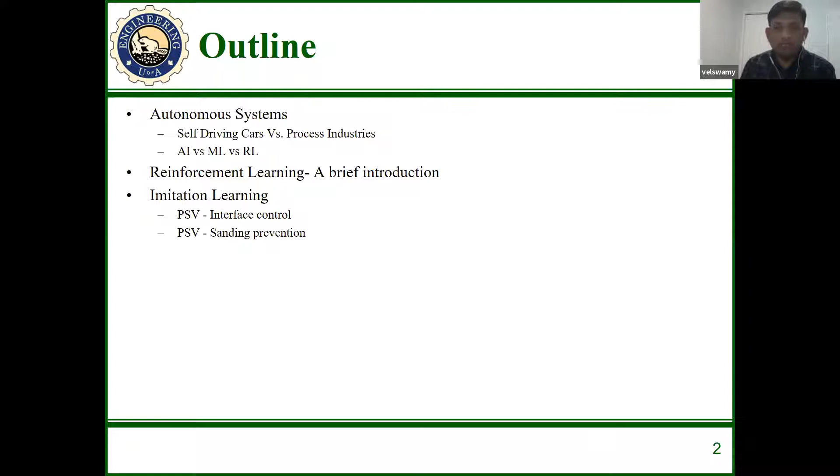So autonomous systems. Decision making is an important part of being a human, and not just mapping between certain inputs that we see and certain decisions that we take based on the inputs. The way we train ourselves, and the way we tackle our situations, all that comes under the purview of autonomous systems. So in eventuality, if there is a certain event that was not anticipated in the past, what would be the actual response that you would get from the agent or the controller that you have trained? That's usually the autonomous part of the decision making.

So there are systems that do exist. If you look at the missile defense systems, which form a blanket over a confined space or maybe the entire country. Given there is a launch of an intercontinental ballistic missile or things of sorts, an autonomous system kicks in, it knows the launch, and then it triggers certain events which make sure that it pinpoints the trajectory of the incoming missile, and it tries to destroy it before it can create havoc in the country. So this is something that does exist.

We've also seen autopilots that are in existence in aeroplanes, at a very high sophisticated level, from a few decades in the past. So this is not something new.

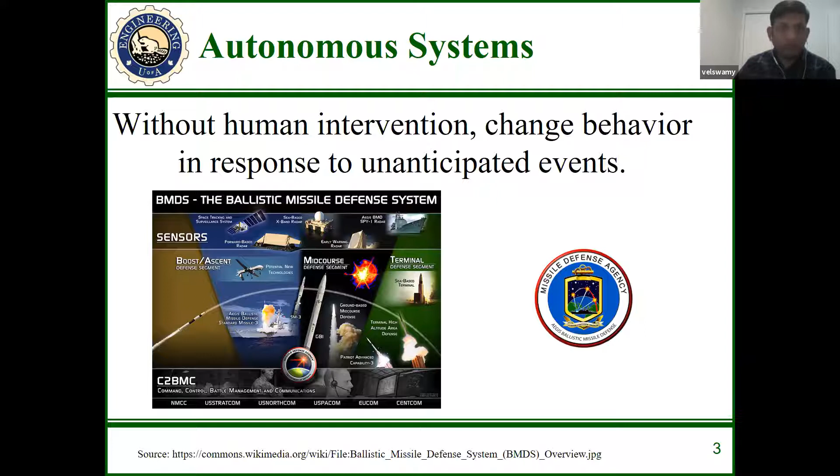When it comes to standardization of different levels of autonomy, there are a multitude of approaches seen in various industries. The one that has come out with a clear demarcation of each level of autonomy is the automotive industry. With the advent of companies like Tesla, which are promoting autonomous driving, this becomes important because the progress of each of those organizations in such technology needs to be graded, and metrics need to indicate what sort of capabilities their vehicles hold.

At the lowest level, we are talking about no autonomy at all. It's a basic vehicle which does not have any electronic control units which talk to each other or log some data which could be processed later. So it's like the ones from the 80s or the 90s.

Then comes the first level of autonomy where you have operational assistance. For instance, you have cruise control where you're on the highway and you just want to take your feet off the gas pedal. So you switch to cruise control at a certain speed, and the vehicle tries to maintain that speed. However, the steering control is still in your hands. And one other scheme is the lane departure alert, where it could alert the driver saying, hey, you're way off your lane, please correct yourself.

The next level is occasional self-driving. You're on a highway and you know that things are all working fine and it's a clear day, so you switch over to occasional self-driving. The vehicle may at some point not need you to steer, but you would still hold your steering wheel because that would probably be necessary.

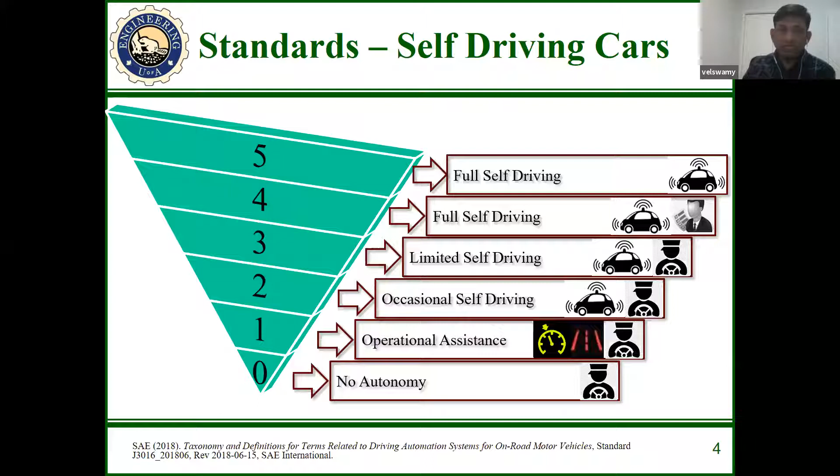Now, is there something of that sort available for industrial plants? Though there's not a fine print on the demarcations and there's no general consensus on how we could look into these sort of standards for an industry, there does exist some amount of discussion that happens in the organizations by their own. Probably at some point they would come together to discuss more about it and standardize it.

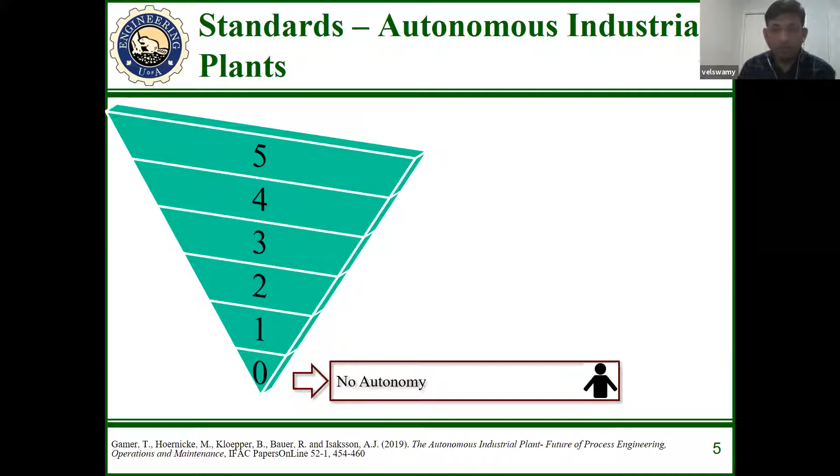At this point, a few publications have become available, and one of them describes autonomy in terms of industry as: no autonomy, where we do not have any sort of autonomous systems. Of course, we have automation, but not autonomy. The next one is operational assistance. This is primarily the digital twin as being discussed in the industry now.

The idea is there is an experienced person, and that experienced person has certain decision-making intuitions, which is probably not something that you can map into a mathematical model because it's more human. So how do you capture the essence of their experience and make sure that in a certain scenario, you give some recommendations where there are certain priorities set to the kind of decisions you can take, based upon the previous experience of that operator?

And this can very well be used in trying to absorb the experience a person has obtained by working in a certain plant and making sure that the transition of that knowledge from that person to someone who is new takes place as smoothly as possible.

Now, occasional control is probably the next level. For instance, if there is a startup or a shutdown, there is a necessity for us to follow a certain sequence, which is pretty mechanical in nature in the sense that the sequences are pretty direct. So you could probably yield control in those situations from a human being to an autonomous system, which can take care. And then comes limited control. Then again, it's a fine grain.

And full control is where you're talking about one supervisor sitting in the control panel or the control room for the entire plant. And all he does is just be there to assess how the system's working, and he does not much.

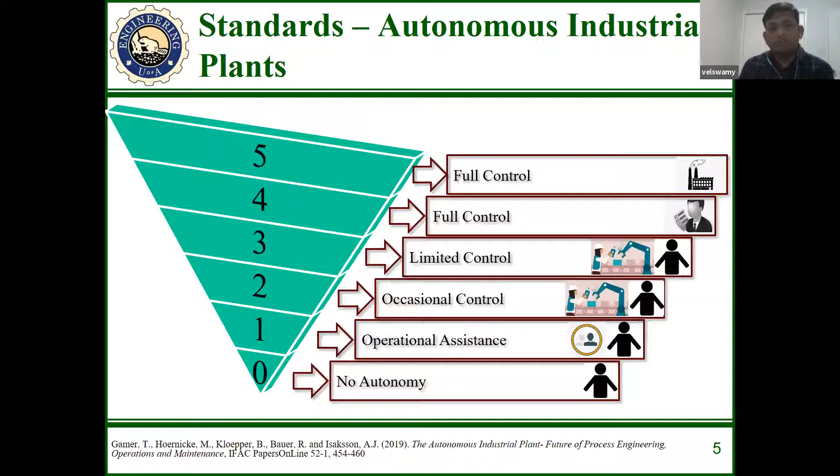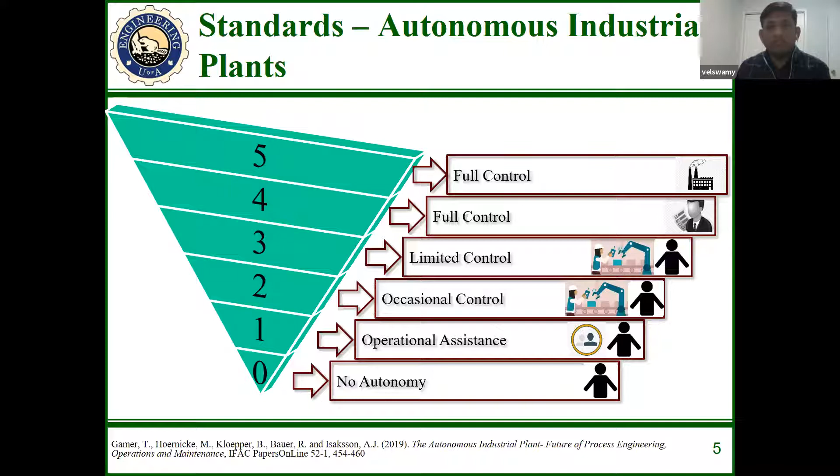And full control is where you have complete autonomy, where there's no single person in the factory, and the entire enterprise solution and the business requirements are trickled down directly to the level of the PID controllers. And therefore, you could probably bring in the financial direction of the company and also environmental compliance and all that, and trickle it down to level 0, where there is a meaningful transition of information from one level to the other.

Again, the difference between autonomy and automation. So what we do in automation is we sense. Of course, there are a bunch of sensors. We might also replace them with a data analytics or a first principles or some sort of a linear regression based soft sensor, and we analyze. Analysis is usually predetermined. So you have a bunch of rules, for instance, if-elses, or it's an explicit sort of a scheme where we have a PID controller.

So you're sensing something and you know that it has to be reaching a certain set point. So the deviation is used, and proportionately a certain amount of action is taken. So all these are predestined. If not specially designed, they are not capable of handling adverse situations.

Whereas autonomy, on the other hand, does not sense but perceive. For instance, it can be an image. For instance, you are walking out in the park on a bright day, and you get to see a particular frame, maybe through a camera, and a bird in that frame would be a feature. So how do you know that there is a bird in the frame? So that is perception. So there is a necessity for us to extract a feature or many features out of that particular frame and make sense out of it.

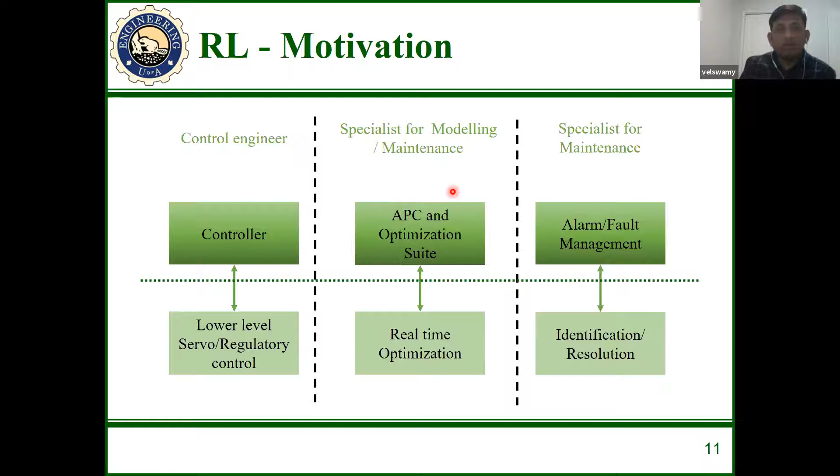From an industrial control hierarchy, there are a few places where we can employ reinforcement learning with respect to trying to learn what a person has gained as an experience. So these are such situations. When we are trying to explore reinforcement learning, one thing that comes into the picture is how do we make sure that it is generalized to take care of every other situation.

For instance, you've been using the transit or the buses which ply locally in, say, Trichy, and now you are asked to do the same in Chennai. There is a multitude of information that is necessary for you to ramp up on your usage of the transit in Chennai, whereas you had enough knowledge to use it in Trichy.

So this is because of the new sort of experience that the agent is being put through. In a similar sense, when you operate your plant at a certain operating region, and that's where you have all the data, and that's where you have trained your reinforcement learning agent, all of a sudden your plant moves from one region to the other. How does your RL agent understand the new region of operation, and how does it do things to make sure that the plant still runs in an optimal fashion, at the same time ensuring stability?

So the stability of the process during the learning scenario for the RL agent is a pretty important bottleneck to deal with. When you're talking about neural networks to represent the reinforcement learning agent, the neural network in itself has its parameters that you need to tune. Like in a PID controller, you have KP, KI, and KD. In terms of neural networks, it just explodes. You're talking about a few thousands of parameters that need to be tuned.

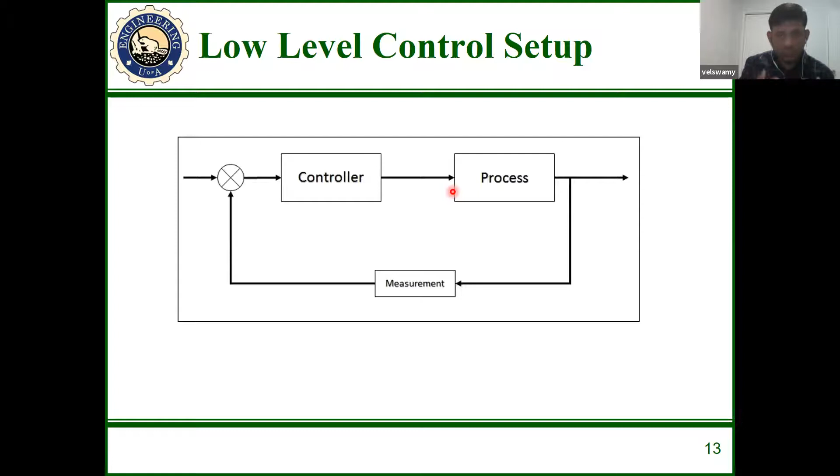So all that is something that's aided, but the kind of space you'll deal with in that level is much smaller compared to the kind of space here, meaning when you look at a measurement, for instance pressure, it's going to be continuous. It's not going to be discrete. So you're looking at a huge amount of data that you will need to really train your network. So if it works here, it's going to work at higher levels. So the way we see it is the controller is actually the agent.

And we use a scheme called actor-critic, where the actor is the neural network which maps your measurements to your manipulations. For instance, it measures the pressure, and then it controls some sort of a flow rate. And the critic is what tries to understand the action in a longer-term sense. So what is the long-term impact of a certain action? That's what the critic looks into. So the critic is measuring the longer-term returns.

So the return is, for instance, if you take one sample time, you're going to have a measurement and a set point. So that deviation becomes a reward. And if you look at the reward for a certain number of steps into the future and you combine them together, then you get the returns. So this is the reward that you have obtained for taking a certain action for a given measurement. So this would allow us to optimally take decisions, which is something similar to an MPC, but in an MPC you would use a model. Here you don't need a model.

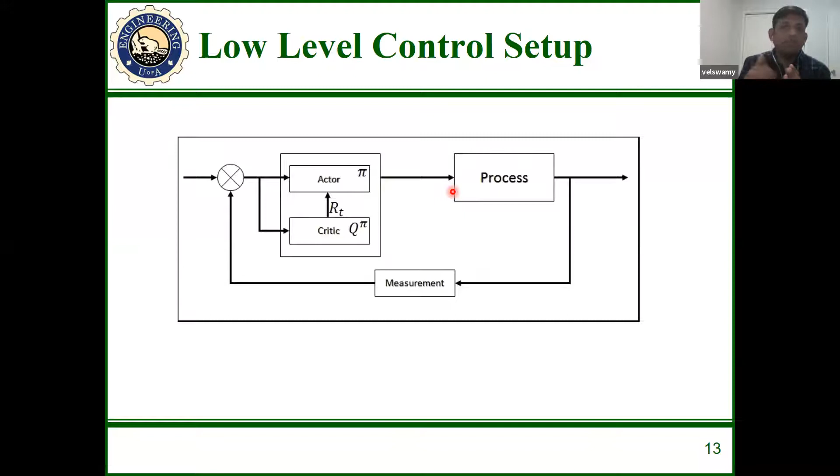Now, all we're doing is the neural network tries to see, if you have a certain point in that space in the input, what's the best point in the output space which can optimize some objective. That objective can be economic, performance oriented, or it can be compliance oriented. And it goes on to learn the best possible mapping at any given instance. And this is exactly what we are trying to do with the neural network using reinforcement learning.

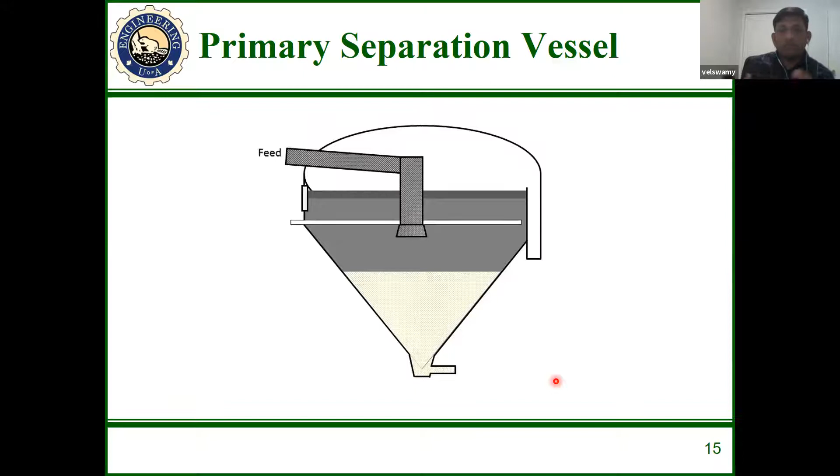A primary separation vessel as such takes open pit mined tar sands that are brought in, crushed, mixed with hot water and some chemicals, and fed into a PSV, which consists of 3 different layers. So you have the middlings layer where the froth, as we call it, is released. It consists of bitumen, from which we recover synthetic crude, and also some solids and water.

So the bitumen is lighter, so it moves to the top, and the solids settle to the bottom. The idea here is there is an interface that's formed between the middlings and the top layer, which is called the froth layer. So the important parameter to control here is this interface. Whenever the interface goes lower, the froth escapes through your tailings to what's called the tailings ponds, where we send the solids as well as hot water, and the solids settle down in the ponds and the hot water is extracted to be used again.

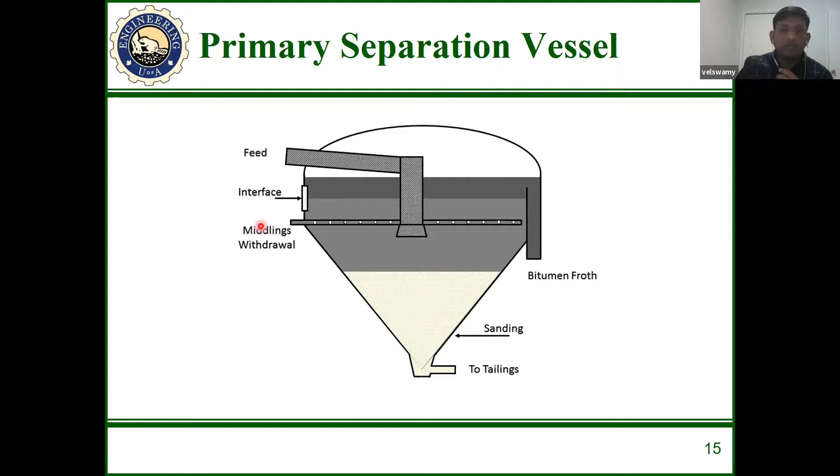Whereas if it goes higher, there is a possibility that the sand can actually go through the top for further downstream production, which would definitely be detrimental to the devices and their working. So it's necessary for us to maintain it at a certain level. That's what we are trying to do here. We used an industry evaluated complex model to come up with the solution. What we've done here is we wanted to track the set point of that interface level, and we utilized a scheme where we went for imitation learning.

If you have come across the news on Tesla, Tesla actually utilizes real driver responses, and the real driver responses are mapped between the sensors in the car and the kind of decision making that the driver has in that scenario. They first filter out the best driving scenarios, the driver's best responses, and then they collate that into information that they use to tune some neural networks. So this is called imitation learning.

It's something similar to what we do here, but it's not something that we have followed from Tesla. It was like 2 branched out things that we were able to look into at probably the same time. So we have an expert and a rookie. Rookie is someone who's new. And what we do is we represent the existing controller, maybe a PID, down here, and also we have the agent, which is our reinforcement learning scheme.

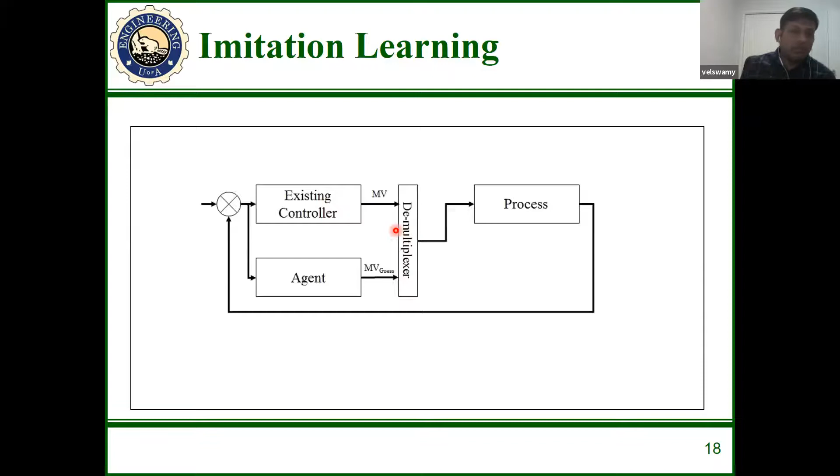So we try to use some sort of a selection mechanism. The selection mechanism is there to ensure that the process is safe. So if the agent is way off from what the existing controller recommends for a given scenario, we ignore the agent and we simply use the existing controller's output. So the manipulations are guessed. And again, this is the actor critic format.

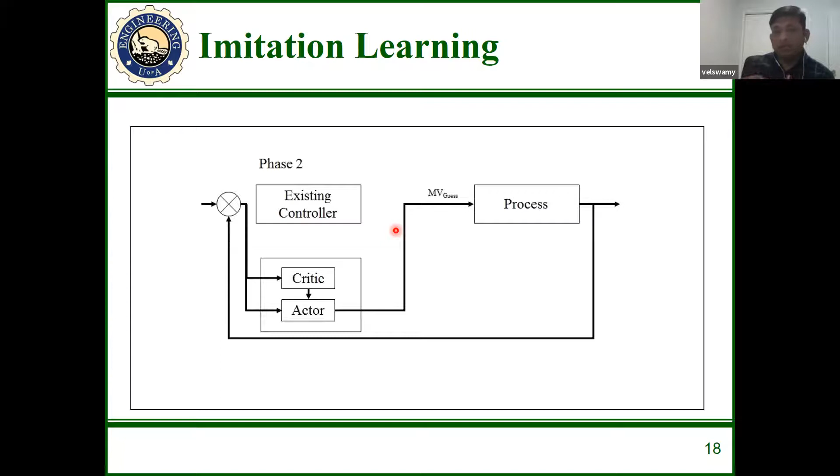So we have a couple of phases of training. In the first phase, we try to make the agent come closer to the existing strategy. And in the second phase, we try to make our agent perform better by sending the right manipulations to the process. And this is just an example of how the whole thing works.

So we are trying to track the interface level here. You see that we are giving some set point changes, and also certain disturbances, for instance, the inflow quality is varied, like how the industry would experience. And that's where you see a lot of oscillations there, some overshoots.

Now, the graph on the right side compares the existing strategy with the reinforcement learning strategy. So in the first phase, in the very beginning, we do see that there are a lot of differences between the decision that the conventional controller takes as compared to the reinforcement learning agent.

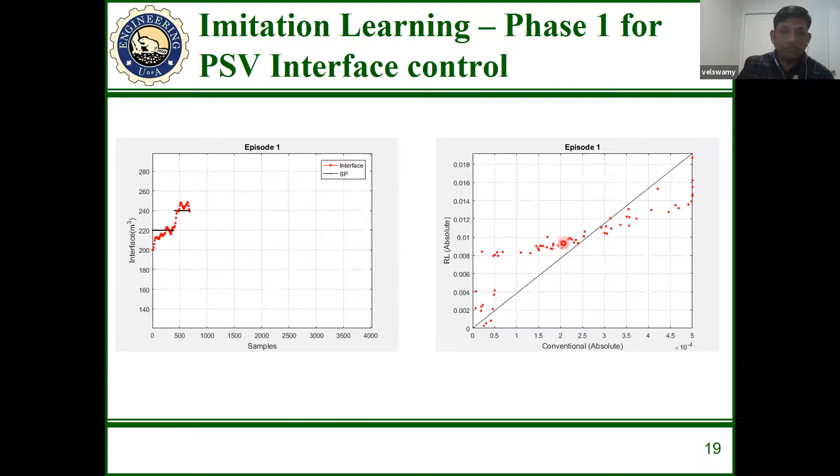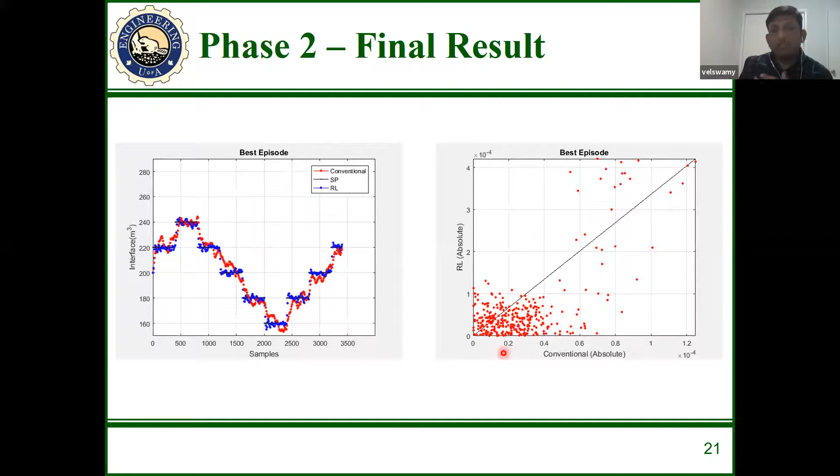So this is just a composite comparison. What you see on the left side is the servo tracking results. What you see on the right side is the comparison between the existing strategy and the reinforcement learning agent's set of actions. As you see, over a period of time, the RL agent has tried to learn the controller and also tried to better it.

This way, we are trying to solve the initial seed problem of the neural network. And this would definitely improve the rate at which we are able to learn our neural network as a reinforcement learning agent. Well, there are certain remarks that we have gotten from this particular scenario.

One thing is that reinforcement learning can really take up a multitude of tasks with respect to the control hierarchy. For instance, we have just showcased what it can do at the lowermost level, replacing a PID controller. We do have research that's ongoing, which, because of the non-disclosure schemes, I would probably not be able to share,

but you could probably look at an RL agent as tuning schemes, maybe at the lowest level, like the controller itself, or it could tune a PID controller, or it could also look into a real-time optimization scheme because it does not need a model. So the amount of time that you will need to design it would be reduced greatly. So RL is able to be a very important tool with respect to autonomous control at various levels of the control hierarchy.